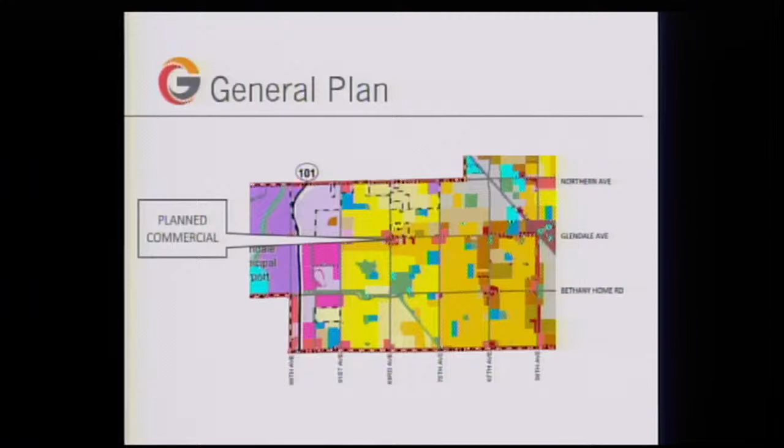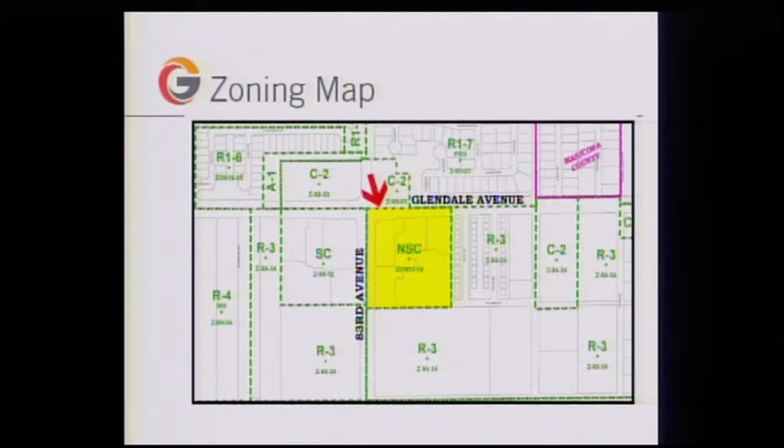A little better depiction of the site - the property is vacant at this time. You can see the development pattern and residential development that occurs north, east, and south of the site. Again, northwest and west are all commercially zoned properties.

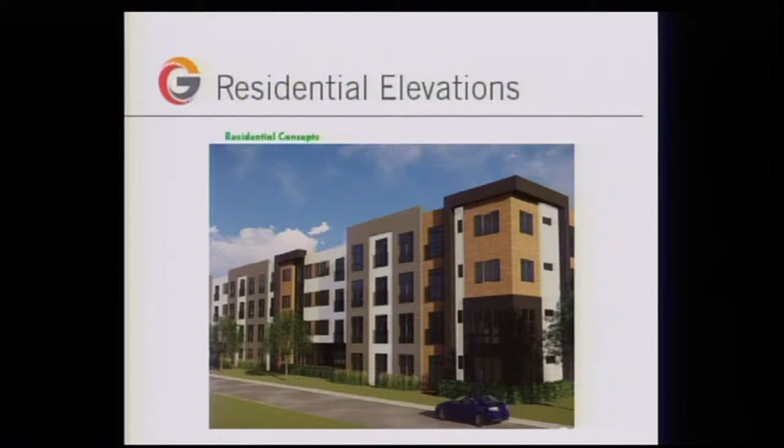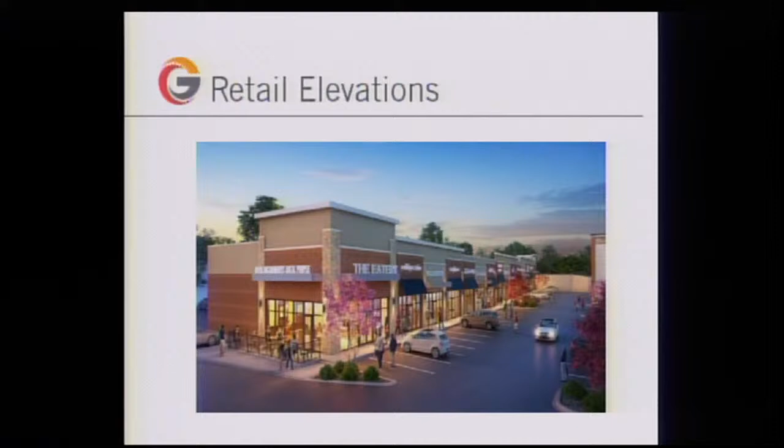These are some elevations provided in support of the request: the residential elevations, concept elevations for the possible lodging facilities and hotels, and for the retail portion of the site.

As far as public involvement with this request, there was an initial notice mailed out on May 13, 2019, last year, to property owners within 300 feet of the project boundary and other interested parties. That was followed by a neighborhood meeting at Westgate, at the Hampton Inn, I believe.

The request has since been advertised. The hearing this evening has been advertised and posted May 14th of 2020. We've also mailed hearing notices regarding the request on May 17th of 2020. We received one comment in support of the project. There should also be a citizen participation plan attached to your packet, detailing the public involvement portion.

Staff finds the request is consistent with the Glendale General Plan, that it complements adjacent development at Westgate, and encourages infill development. Staff is therefore recommending approval of GPA 1910 and ZON 1905, subject to the following conditions.

First, the site plan dated May 1st, 2020 and elevations dated May 1st, 2020 are considered conceptual and are subject to final design review approval.

Second, the applicant shall work with the city's transportation department to resolve the design, location, and number of access points to the site. The number of access points, the width of the access, and the design of the driveway shall adhere to the City of Glendale's engineering standards.

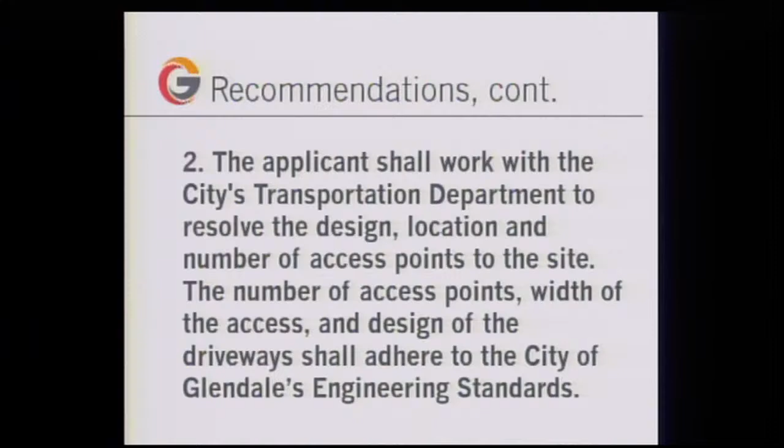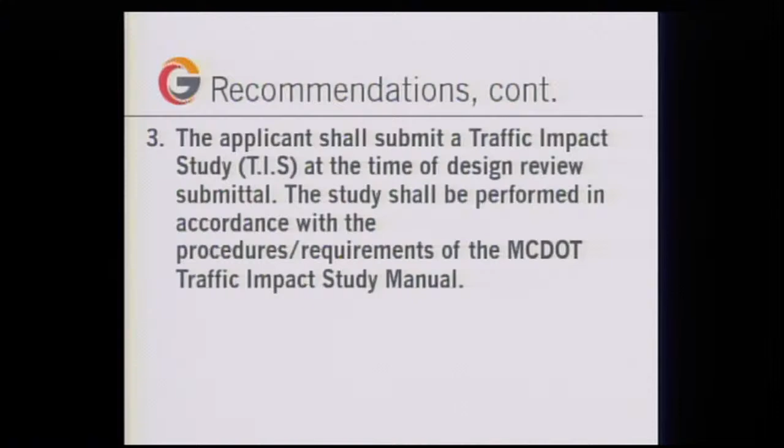Third, the applicant shall submit a traffic impact study at the time of design review submittal. The study shall be performed in accordance with the procedures and requirements of the MCDOT Traffic Impact Study Manual.

Fourth, the developer shall provide the half-street right-of-way dedication along Glendale Avenue and 83rd Avenue with all associated roadway improvements listed in the City of Glendale's engineering standards.

Fifth, the 12-kilovolt power lines along 83rd Avenue shall be placed underground. Sixth, a minor lot division shall be required if buildings are to be developed over the lot lines.

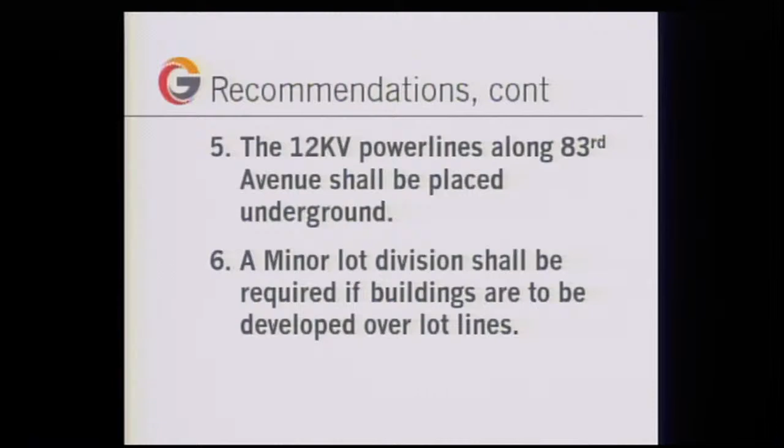Seventh, the developer shall record a notice to prospective purchasers of the proximity to Glendale Municipal Airport, in order to disclose the existence and operational characteristics of the airport to future property owners or tenants of the property. Eighth, design review will be required.

Mr. Mayor, that concludes my presentation.

All right, thank you. Questions from the council? No questions from the council.

A public hearing is required, so the public hearing is now open on item 25, Resolution R20-99, Ordinance O20-55. I have no speaker cards on this item. Anyone in the audience wishing to speak? Seeing none, the public hearing is now closed.

Do I have a motion on Resolution R 20-99 on item 25? Yes, Mayor, I will make a motion, and then I ask to make some comments regarding the project.

I move that... let me find the right place. I move we adopt resolution number 20-99. Second. Okay, I have a motion from Councilmember Clark, second from Councilmember Malnar to approve the recommended action.

Any discussion on the motion? Yes, Mayor. Councilmember Clark: At this time, I have presented all of council and senior staff with my remarks regarding this item, and I would like to read them into the record, the public record, so you will please bear with me.

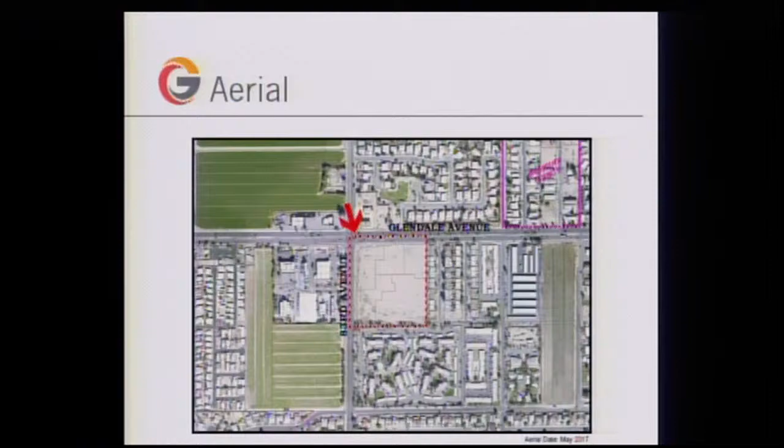One thing the Transportation Department asked early on was to abandon the Lamar Road alignment, the first major street south of Glendale Avenue. We have abandoned that, so there won't be a road back in there, which might otherwise be difficult to defend or monitor, without really knowing what people might be doing back there.

These are the duplexes I mentioned, apartments, more duplexes, self-storage, and a care facility. The nearest single-family home, Councilman Malnar, is down here on Ocotillo, about a quarter-mile south of the site. If I may, Mayor, how close are they to the duplexes? The duplexes would be here.

If the site were designed and approved with this configuration, the distance from here to the duplexes would be about 175 feet.

Additional questions, Mayor, if I may. Go ahead.

The other objection was about the gasoline station having an additional convenience store. With one already there, what would be your objection to not having that stipulation? Our preference would be to have a financial institution on the corner. That particular end user, I can't get up here in front of council and the public and say that we're going to have a financial institution on the corner.

Is that accurate? Mayor, Councilmember Malnar, the exhibit that's part of the slide and part of the packet, again, we're only looking at 88 units. It's only on 5 acres, and the 17.4 units the acre, that's been the sweet spot for Glendale in terms of multifamily, for probably 25 years.

Properties that I've noticed have gotten approved recently are a lot higher density. Do we need 4-story on the site? Probably not. We could probably live with a 3-story height limit.

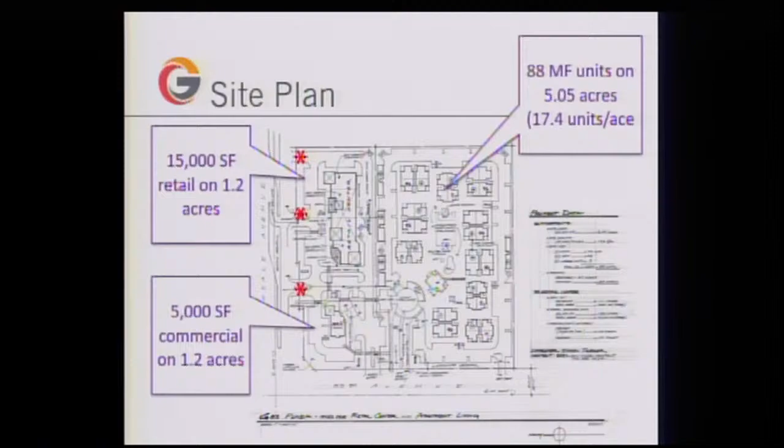The site plan or some of the renderings that were provided are illustrative in nature. The one is showing 4-story. It probably would not, because the site is so small, would probably not render 4-story apartment buildings. To directly answer your question, Councilmember Malnar,

5 acres out of an 8-acre site, I'm not the best mathematician. Probably 50% of the site is shown as multifamily. The apartment or the hotel that we're hoping to locate, should it locate on the site, would probably be here, and then the multifamily would go away.

Very good. That's all the questions I had. Mayor. Go ahead, Mr. Froak.

I'm glad you admitted you're not a good mathematician, because in your narrative, you state that 61% of the site will be consumed by this apartment complex. It's not my words, I didn't do the math on it. Y'all did. Now I hear talk like it's only 5 acres. Yeah, it's only 5 acres of an 8-acre site. So in essence, the majority of the site will be consumed by apartments.

You keep saying a couple of things that bother me. One is that, well, we don't think apartments are really going to come to this site. Well, if you don't think so, why are you fighting so hard to make sure that you do have multifamily approved on this site, number one? Number two, you say that your client has it in escrow to a developer. Well, does that developer have any end users? Are any of those actually end users multifamily? No.

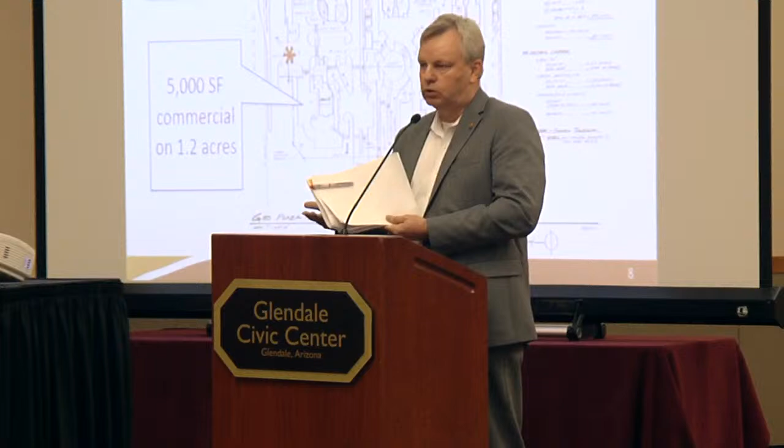So again, if I had 20 people here or 5 people that were concerned with the project, we would have worked with staff and would have tried to work this out. But I don't like to negotiate at the podium. I got your stipulations about an hour ago, and I'd rather fall back on what you suggested on the liquor license, where we go with the staff recommendation, and in this case, the Planning Commission recommendation for approval.

Mr. Mayor, may I respond? The reference to the truck stop is beneath you, John, but I'll let that one go. Secondly, I believe we met at least on one occasion, and perhaps more, on this very project. And at that time, I conveyed to you, in no uncertain terms, that I didn't believe apartments were appropriate for this site. And you represented to me at that time that that was not the plan. So I was very surprised when I finally saw this conceptual in the packet that shows a plan that includes multifamily. And that's all that I have to say. Thank you.

Any other comments? Mayor, go ahead. Thank you, Mayor. So, Mr. Folk, I guess the idea, ideally, it's going to be a hotel, and a 2-story hotel there obviously wouldn't work either, right? So the height would work for either the multifamily, which I'm guessing probably the density is needed for it to pencil out financially for the project.

Mayor, Councilmember Tolmachoff, correct. It's a free market society. That's what this state believes in. We're a private property rights state. I've got a client that sat on the property now for 17 years that can't do anything with it. I spoke to him a few hours ago. He was going to be here tonight to discuss some of the past conversations that he has had with the city, with Councilmember Clark. We agreed just to have me come down here and represent the item.

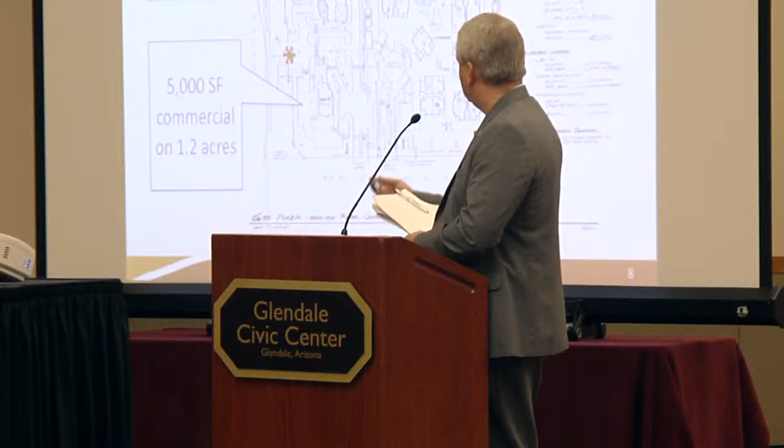When I've walked the site, I've picked up debris. It's not really doing the community much good. Like I said before, what we're going to do when the site develops, and hopefully someday it will be nice, we're going to work out all of the transportation components, access points. The median break was set up to serve the site, and so we're going to continue to work with the staff, and we will work with the neighborhood as needed once we do end up with final users.

So is this speculative zoning? Yeah, to some extent it is, but we can't live with the existing zoning. And like I said before, as part of the presentation, the site was multifamily for the entire 8 acres, and in good faith, the owner agreed to the rezoning years ago and tried to find users, and nobody was willing to develop 50% of the site in phase 1 with financing and things of that nature.

So we feel that we've worked with the neighborhood really closely, and we will continue to work with staff and with the neighborhood to try to make this a high-quality project for the city. Mayor, I don't have anything else.

If I could respond regarding Councilmember Tolmachoff - as you know, there's a 300-foot notification, which means the Walgreens, the Ella's Bar, and the owner of the vacant gas station would have been most likely the only people notified. I did not raise this as an issue with my constituency because I had relied upon representations that there was no multifamily coming, and only became aware of it when we got the packets.

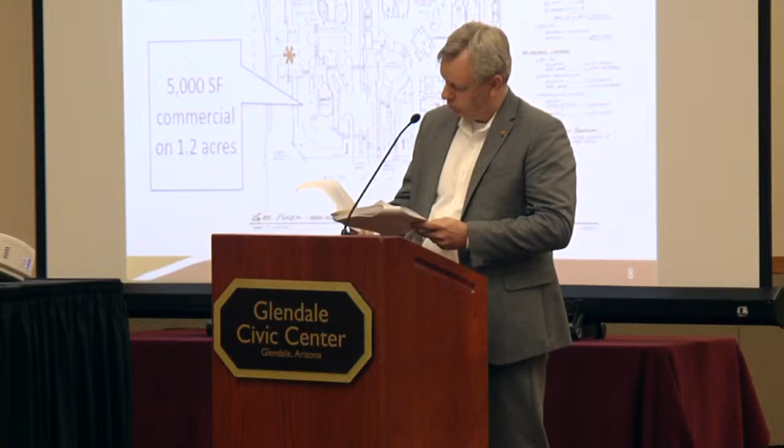We'd actually just prefer the 8 stipulations, like I said, but we could add the 2 stipulations and drop the third one regarding the CUP. As Councilmember Malnar indicated, the market's going to decide if somebody really wants to put a gas station on this corner. The site on the northeast corner with the abandoned gas station and the C-store and the billboards, they closed for whatever reason, I don't know, but it's been in that condition for a long time.

And I don't know if anybody remembers, but inside that gas station on the northeast corner there actually used to be a Taco Bell inside. A lot of people may not remember that. For whatever reason, I don't know, I think it's a great location, but it's never come back. Maybe the price is too high, I don't know.

You had a question? Thank you, Mayor. Yes, I'm not comfortable with changing the percentage. If your developer's willing to go 3 stories, they lose 25%, so they go from 88 to 66 units anyway. If they lose space, the project may not work. So I feel like a 3-story is a fair compromise anyway, and leaving it at the 5 acres I think is reasonable, because it has to make financial sense for the developer to pursue it.

But I think Mr. Froak said that 50% would be okay. Right, that was correct, that was my understanding. 50% would be 4-point-something acres? Mr. Froak indicated yeah, he could support 3 stories at 50%. That's what he said. We'd be okay with that.

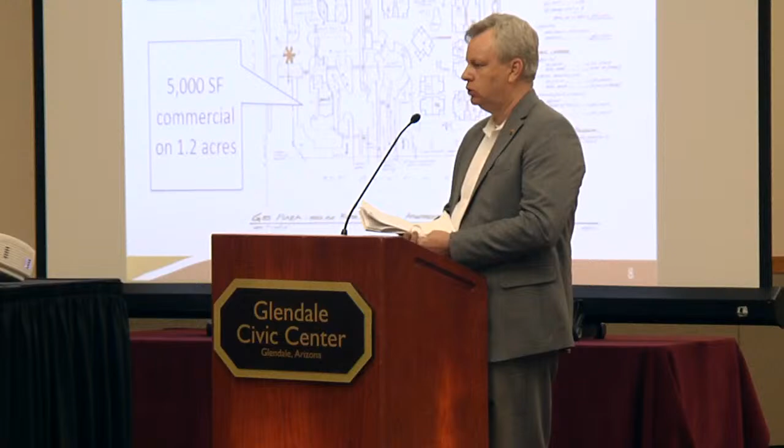Yeah, if you go to 50%, that's...

Mayor, may I state that there are certain guidelines and standards that even apartments have to comply with, requiring a certain amount of landscaping, whether it's on 4 acres, 6 acres, or 10 acres. Rather than assuming it will retain the same density, I'm assuming it will have to reduce density to accommodate the City of Glendale's guidelines and standards for development. So we're coming at this from two different angles.

Mayor, if I could, what I'm saying is the lower density may not make financial sense for the developer, and then the parcel remains vacant.

Councilmember Tolmachoff, I would just reiterate, in a conversation I had with Mr. Froak prior to this meeting, he was still representing that there probably wouldn't be apartments at this site. I don't know what's going on at this point, but I do believe that if apartments are built, this site should not be consumed predominantly by apartments. This site was always intended to provide neighborhood retail.

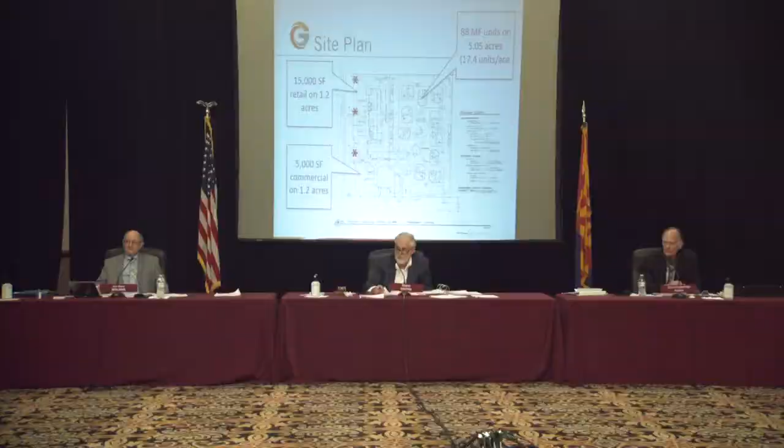Okay, any other discussion? Hearing none, roll call vote. Point of order: your stipulations aren't going to be placed in your resolution. Your stipulations will be placed in the zoning ordinance.

Sorry, okay. Then I will offer my original motion, which is the resolution only. I ask that this council approve resolution number R20-99. Okay, we have had lots of discussion.

I have a second from Mr. Malnar, and a motion from Councilmember Clark. We will do a roll call vote. Councilmember Aldama, how do you vote? Aye. Councilmember Clark? Aye. Councilmember Hugh? Aye. Councilmember Tolmachoff? Aye. Councilmember Turner? Aye. Vice Mayor? Aye. Chair votes aye.

Now moving on to ordinance 020-55 with stipulations. Yes, Mr. Malnar, go ahead and make the motion with the stipulations. I move we pass and adopt ordinance number 020-55 with the following two stipulations.

Number 1, any multifamily constructed on this site shall be no more than 3 stories in height. And stipulation number 2, multifamily can comprise no more than 50% of the developable land on this site.

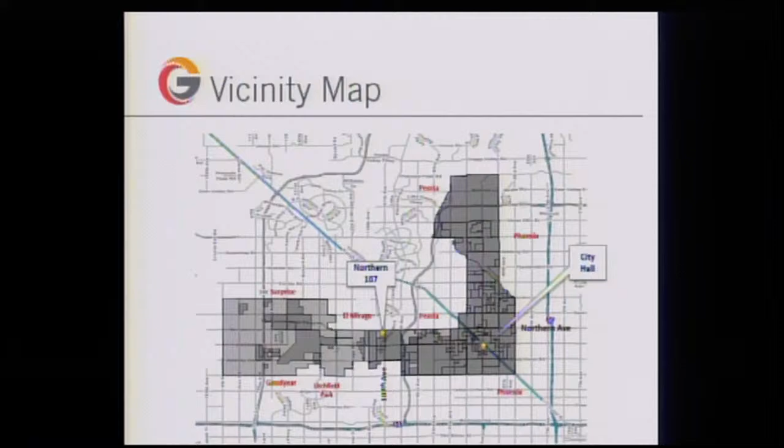The council has taken previous actions regarding this subject site having to do with annexation of the property. It was part of a council work session on February 25th, where we introduced the annexation proposal along with the proposed retail and multifamily residential project. Council consensus at that time was to move forward with the annexation process. There was a public hearing on the annexation proposal on April 14th, which was the public review following the filing of the blank petition that initiates the process. At the City Council meeting on June 9th, the annexation was approved and is now in full force and effect. It is now part of the City of Glendale.

Purpose for the hearing this evening is to consider GPA19-08, an amendment to the city's general plan from medium-density residential, 3.5 to 5 units per acre, to high-density residential 20 - that is 12 to 20 units per acre - and general commercial. The second request is a zone change from general commercial C2 to planned area development, to include commercial uses and a multifamily residential component.

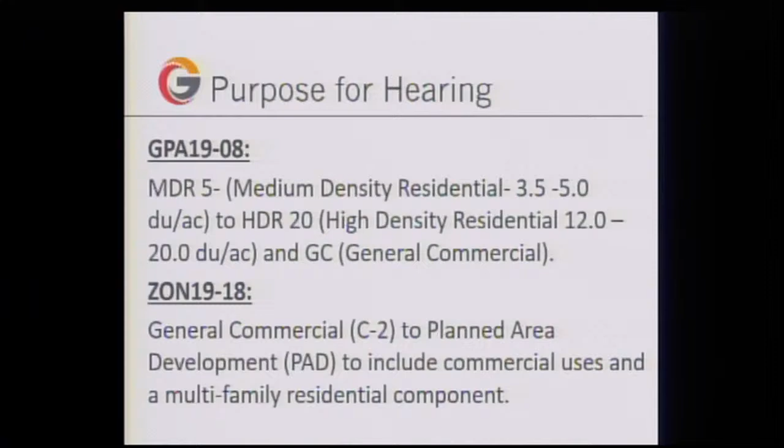The request involves a 10-acre parcel located at 107th Avenue and Northern. The proposal is multifamily, residential, and commercial uses, depicted on the screen inside the yellow dots. This is the southwest corner of Northern and 107th. To the north is the city of Peoria. To the west and south are residential areas within Maricopa County. To the east of the site is the city of Glendale.

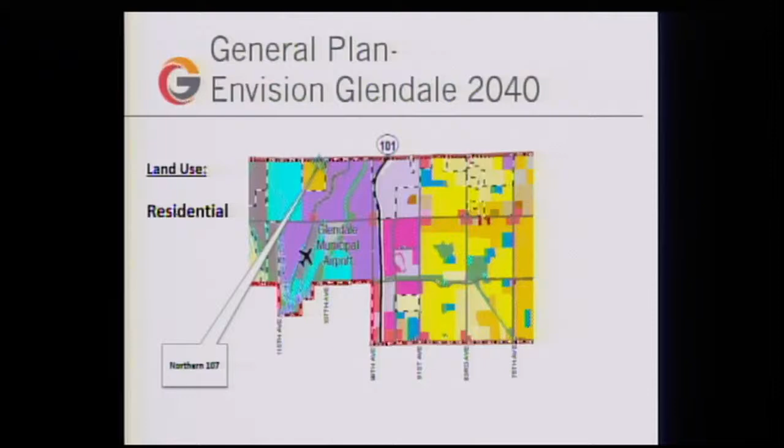This is part of an area previously outside the city, recently annexed, designated by the general plan as medium density residential, 5 units to the acre. Land use assumptions with regard to the planned area development involve either a commercial and residential combination or a commercial-only facility. The Northern and 107 planned area development, PAD zoning, was recommended for approval by the Planning Commission on May 7th, 2020.

With regard to fiscal impacts and assumptions regarding development of the facility, there are two options. One would be a combination commercial and residential facility, which would be the lowest range revenue scenario. The commercial-only option would be the highest range. As discussed as part of the annexation proceedings, the different possibilities are mapped out here, showing the revenue stream from the combination of uses versus commercial only. Annual net benefit range would fall between $120,425 and $292,658. One-time revenues for the residential-commercial combo would be $433,000 in construction sales tax versus $235,000 for the commercial-only component. Again, this is something the City Council considered as part of the annexation process.

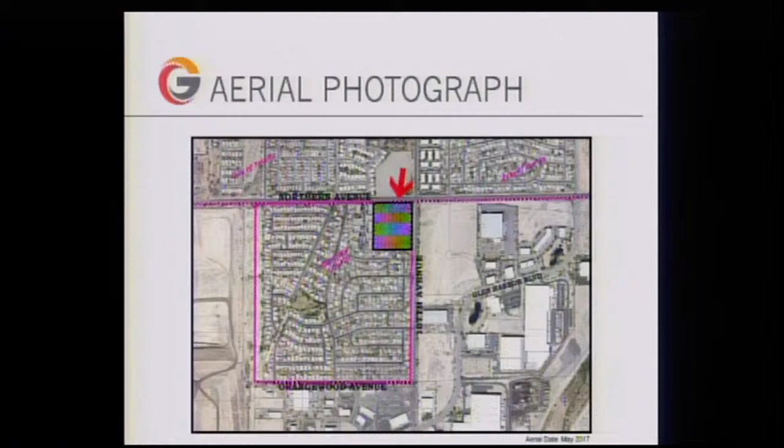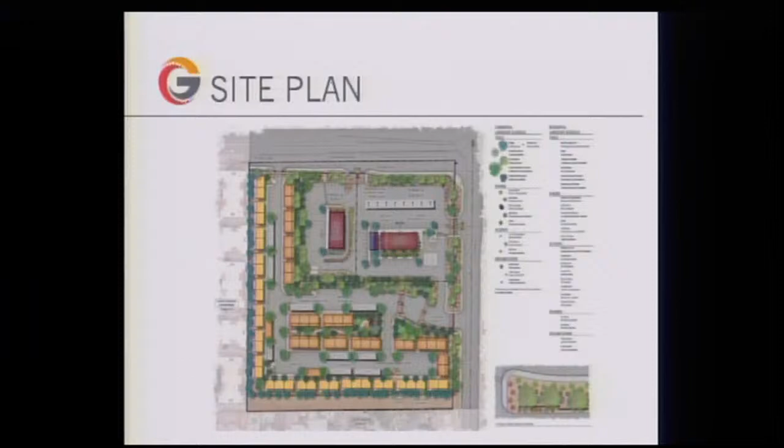A little better look at the property, the landscaping, and the layout setbacks. I wanted to point out this is a 15-foot setback along the west boundary, as well as a 48-foot setback along the southern boundary that includes an easement in that location.

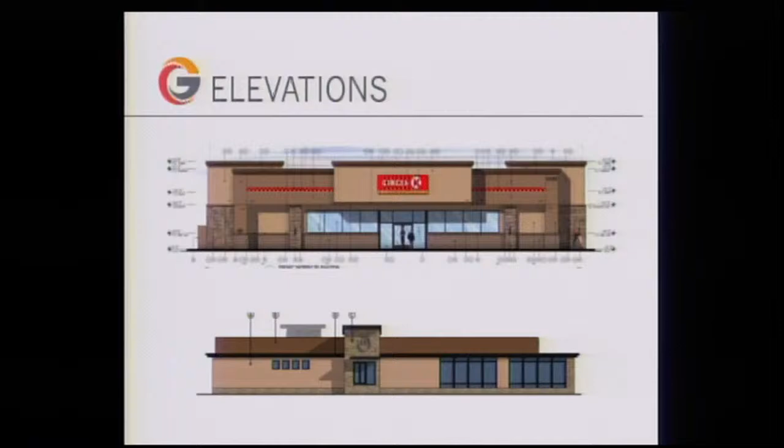Just quickly, some elevations that have been forwarded as part of the anticipated submittal on the Circle K at the hard corner, as well as the residential development interior to the community. The single families are at the top of the screen, single story at the top, and the 2 stories at the bottom of the screen.

With regard to public involvement, the initial notice regarding this proposal was mailed out on March 26th, 2020 to property owners within 300 feet and other interested parties. There were a total of 32 mailings within 300 feet. The request was advertised and the site was posted April 16th of this year. Hearing notices were mailed April 17th, 2020. There was a neighborhood meeting on March 11th.

We have received written commentary from a representative of the property owners to the west, highlighting some of the issues regarding traffic, privacy, and noise. They've also talked at some length about the possibility that 2-story buildings could be placed next to the perimeter of the property. This is a 1-story residential development next door.

The developer, working with the owners next door, has decided to go with single-story structures along the perimeter, and the 2 stories would be limited to the interior of the project site. Through the review by the Planning and Zoning Commission, the total number of units was also reduced from 91 to, I think, 74. We've got that in the stipulations. I'll come back to that.

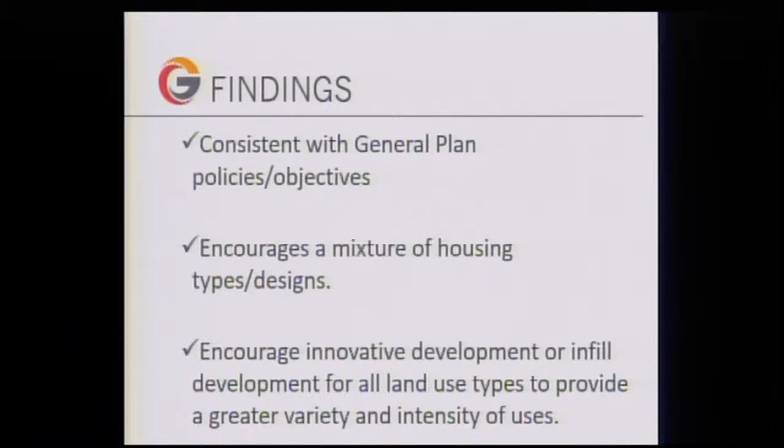Staff is therefore recommending approval of GPA 1908 and ZON 1918, subject to the following. Number 1, development in substantial conformance with the development plan dated April 9th of 2020. Number 2, the developer owner of the shopping plaza shall be responsible for providing and constructing a CMU wall with a minimum of 8 feet in height along the property lines that abut residential zoning districts. Excuse me, 8 feet or 6 feet? It says 6 feet here. Okay, I think you said 8 feet. Did I say 8? I'm sorry, 6 feet.

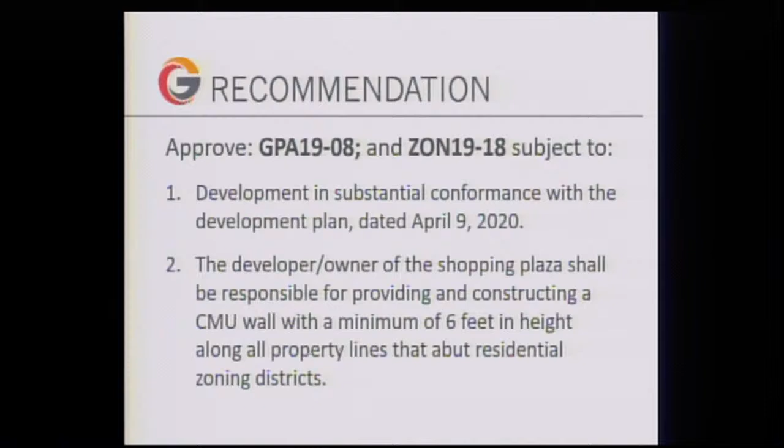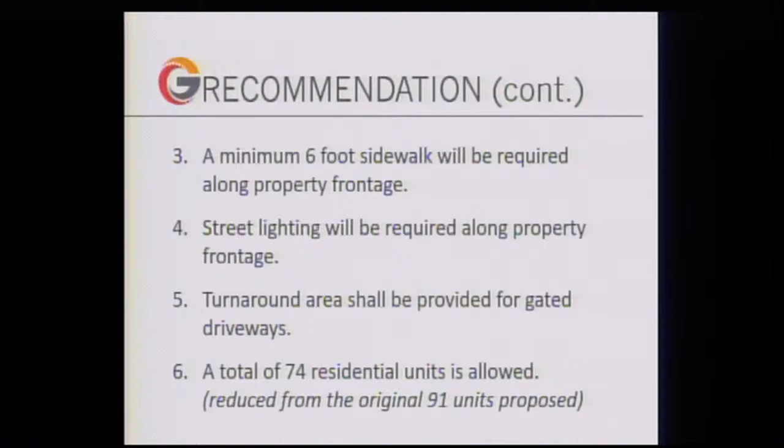Number 3, a minimum 6-foot sidewalk will be required along property frontage. Number 4, street lighting will be required along property frontage. Number 5, turnaround areas should be provided for gated driveways. Number 6, a total of 74 residential units are allowed, as opposed to 91. Mr. Mayor, that concludes my presentation. I'll respond to any questions.

Okay, and I'm trying to, Mayor, figure out why my paperwork's showing different numbers than yours.

Mayor, I want further clarification because it's my understanding, Mr. Gerhart, that the applicant did agree to an 8-foot perimeter wall, despite what your narrative shows tonight. I also want to clarify for the public that lives in that area that I have received assurances the applicant will be building 1 story to the west and to the south, abutting the existing residential units already there. So, Mr. Gerhart, can you clarify whether it's an 8-foot wall or a 6-foot wall? You know, I was just looking at this in the code book for someone else recently. I believe the code standard is 8 feet between commercial and residential. I believe the applicant agreed to the 8-foot. Yeah, I think you're correct. So I think that needs to be corrected within the narrative.

Yeah, if I could, my confusion here is my paperwork showing resolution 020-100 and ordinance 020-56, but the chart up there says GPA 1908 and ZON 1918. So I'm either reading this wrong or it's wrong on the board. I just need to make sure we do it correctly so the public's not confused either. Correct, I think it's GPA 1908. I'll have to check that.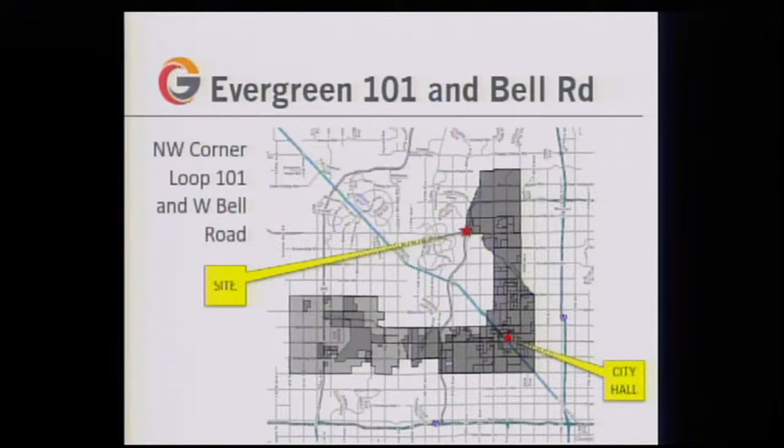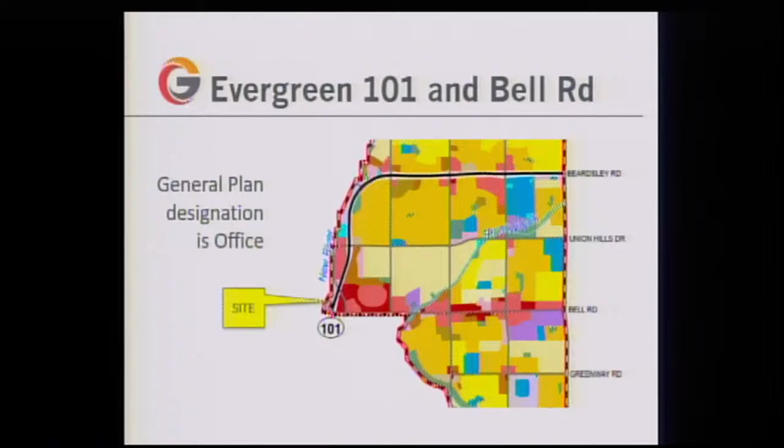Depicted here in the slide, the current general plan designation is for offices. The site is exactly west of the 101, right at the edge of the city boundary. This is the zoning map depiction, with the subject property shown in yellow. It was previously approved as a planned area development some years ago. That's the Loop 101 right-of-way just east of the site, and 83rd Avenue wraps around the property and crosses Loop 101 to the south. Somewhat east of here, you can see the detail of the Arrowhead Mall, just for reference.

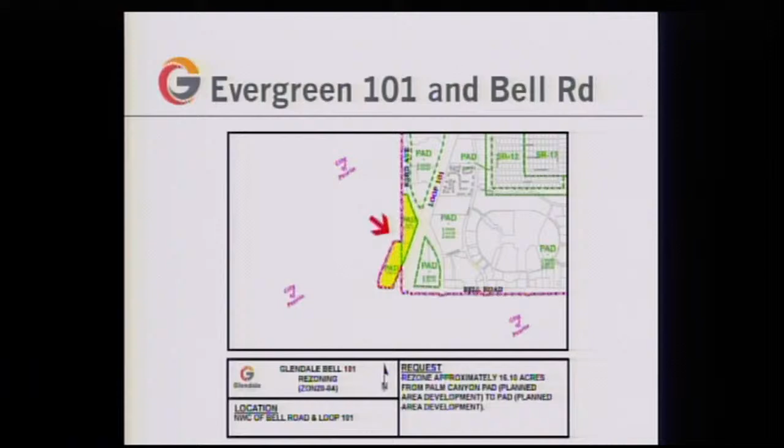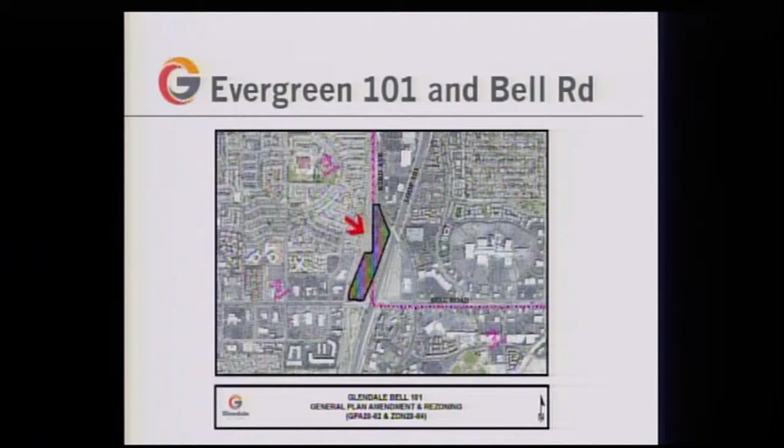Once again, the property location: a portion of the site is encumbered by the FEMA flood channel for the New River corridor. Again, you're looking at Bell Road and the Loop 101 and the intersection of 83rd Avenue. Areas to the northwest are largely residential; the rest of the adjacent properties are pretty much commercial.

This is the subject property, tipped counterclockwise with north to the left of the screen. That's 83rd Avenue at the property frontage, which would be the site of the primary access. At the opposite end, there would be an emergency-only access at Bell Road. In between is a linear parcel, about a quarter mile long and maybe 300 feet wide, with the 101 on one side and the flood channel on the other. The plan includes 4 L-shaped buildings, 4-story structures, 60 feet tall, 26 units to the acre, totaling 418 multifamily units as part of this project.

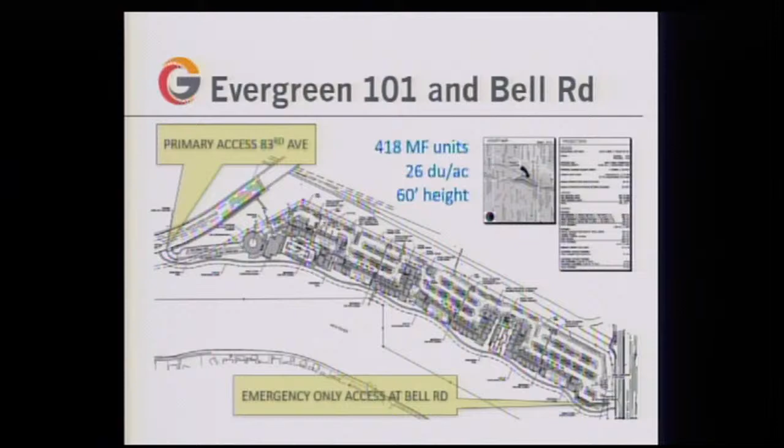With regard to the history of the site, it's currently vacant. It was approved as part of a prior planned area development known as Palm Canyon by the City Council in 2006, but that was never developed.

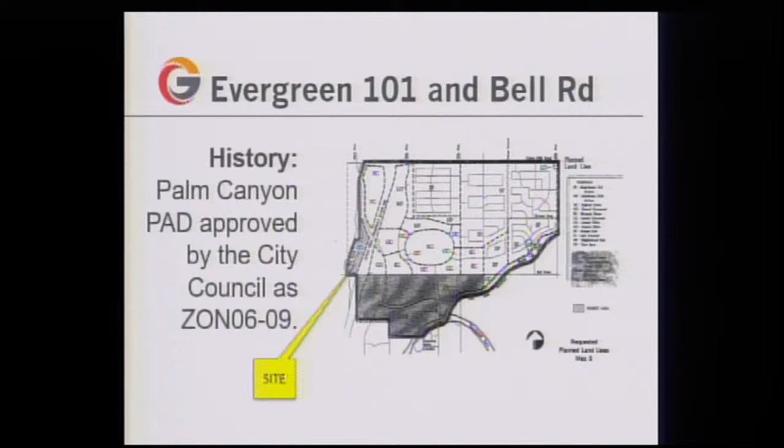The applicant is arguing that this is not a good site for commercial development, due to the size and shape of the project and its proximity to the Wash Channel. It's difficult to develop in a commercial format.

This is a better look at the site. You can see the Arrowhead Mall to the east, along with access roadways also to the east, 83rd Avenue and 101, and to the south you can see Bell. There's a high-density residential development site to the northwest, and the rest is commercial.

Initial notice regarding this project was mailed out on April 24th to property owners within 300 feet of the property. There was a neighborhood meeting on May 11th. The proposal site was posted on June 23rd. The hearing request was advertised June 25th in the Glendale Star, and hearing notices were also mailed out on June 26th.

There were some comments received. They're part of the citizen participation final report that are included in your packet.

As far as findings, staff feels the PAD proposal would result in a quality development product which is consistent with the goals and objectives of the general plan by offering a variety of housing types, promoting some additional housing variety, and developing a difficult infill site.

Staff is recommending approval subject to the following stipulations. Number 1, the development of the site be in substantial conformance to the Evergreen Loop 101 and Bell Road PAD submittal dated June of 2020.

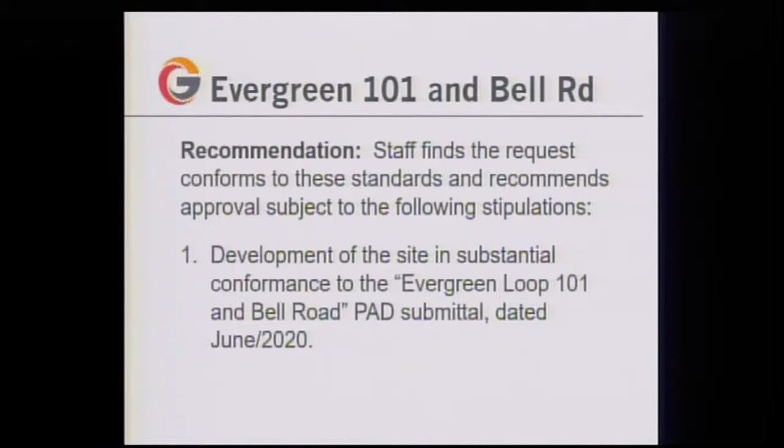Number 2, modifications to the river need preliminary and final approval from FEMA. There is a conditional letter of map revision, CLOMR, required by FEMA prior to development, as well as their letter of map revision, where they update the FEMA flood maps as a follow-up. No building certificates of occupancy would be obtained until the LOMR is received from FEMA.

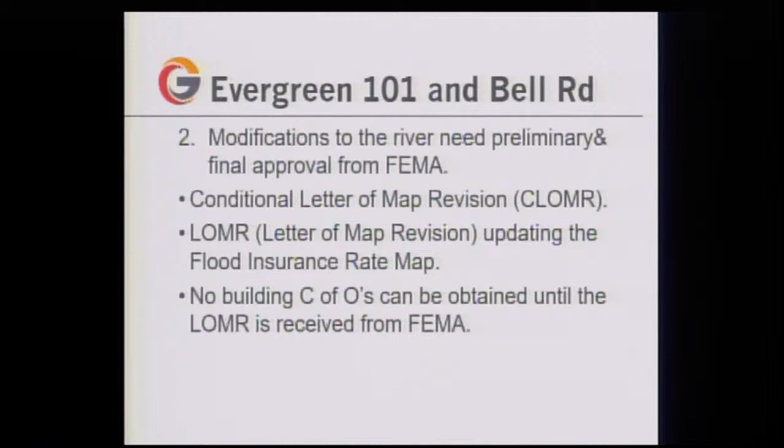Number 3, implementation of the traffic study. There are site improvements required at the access point from the development onto the 83rd Avenue intersection, including a southbound 83rd Avenue right turn deceleration lane and a northbound 83rd Avenue left turn lane. A left turn out of the site will need to be constructed by the developer, requiring modifications to the existing raised median at the north of the site. The developer will be responsible for the cost of all required off-site traffic improvements.

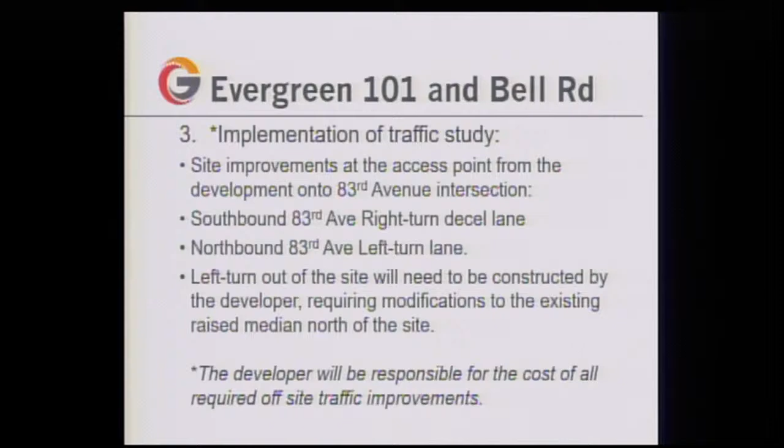Number 4, all half-street improvements on 83rd Avenue adjacent to the site would be completed with development of the property. Number 5, right-of-way improvements include streetlights at the property frontage, 6-foot wide sidewalks on arterials, and an ADA accessible route connecting the site to the 83rd Avenue right-of-way.

Number 6, approval of a minor land division application lot tie to combine all the parcels. There are about 7 separate parcels that the site plan overlaps currently, and they would have to be combined. Number 7, submittal of a signed Proposition 207 waiver.

Number 8, design review for all physical development associated with the proposal, together with a sound attenuation plan as required by Section 7.705 of the City Municipal Code. Mr. Mayor, that concludes my presentation. If you have any questions, I'd be happy to respond.

Questions from the council? No one? Okay, we do have one person that wants to speak. Ken Watt, if you're next door, if you'll come over here, please.

While he's doing that, we do have a public hearing. I'm going to go ahead and open that up, waiting for him. Public hearing is now open on item 27, Resolution 020101 and Ordinance 020-57.

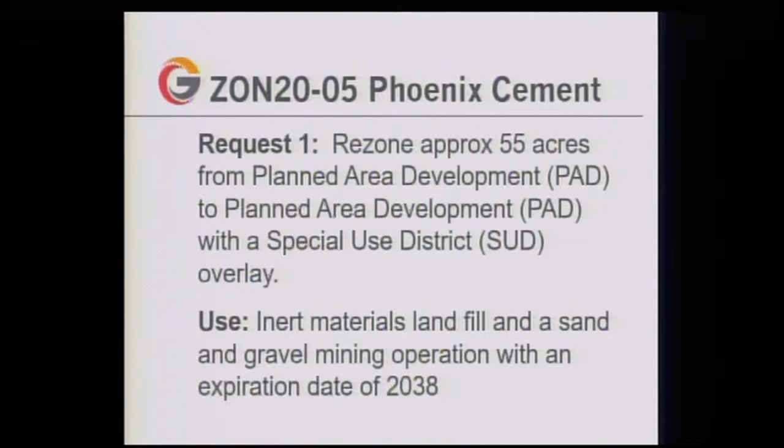Thank you, Mayor and Council. Once again, this is a request for a zoning change, specifically ZON 20-05 by Phoenix Cement. It's a two-part request. The first part has to do with rezoning 55 acres from Planned Area Development to Planned Area Development with a Special Use District Overlay. The current use is for an inert materials landfill and a sand and gravel mining operation, with an expiration date of 2038. The second part amends an existing Special Use District overlay in the PAD and light industrial M1 zoning districts to extend the time limit for mining operations an additional 5 years to the year 2038. The applicant is Gammage and Burnham for Phoenix Cement. This is the subject property, located along the east side of 115th Avenue, just south of Glendale Avenue.

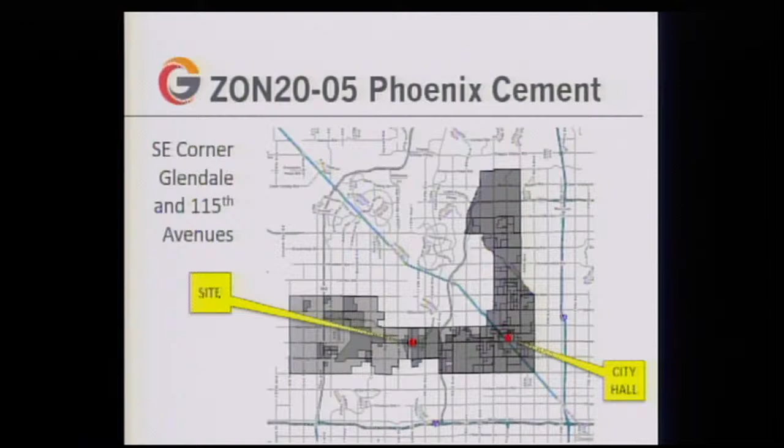It's located within an area designated by the city's general plan as appropriate for business park uses. Again, this is just alongside of the Glendale Municipal Airport.

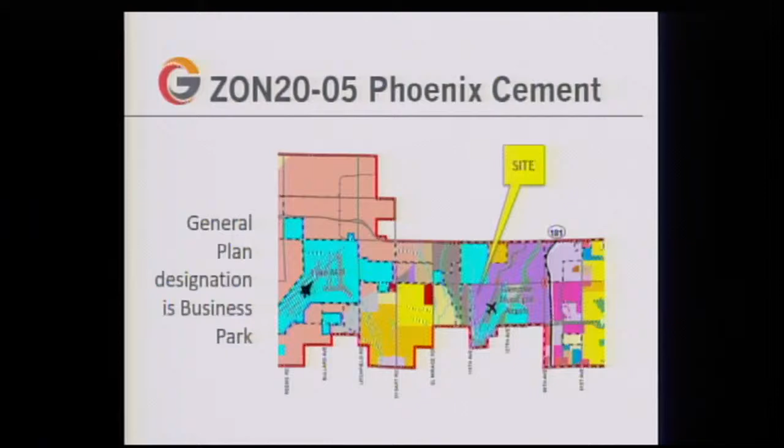This is the zoning map depicting the subject property in yellow. It overlaps two different PAD districts as well as the existing SUD district, and includes the M1 zoned property to the south where the existing operation currently commences. It's located alongside of M1 district as well as other PAD districts.

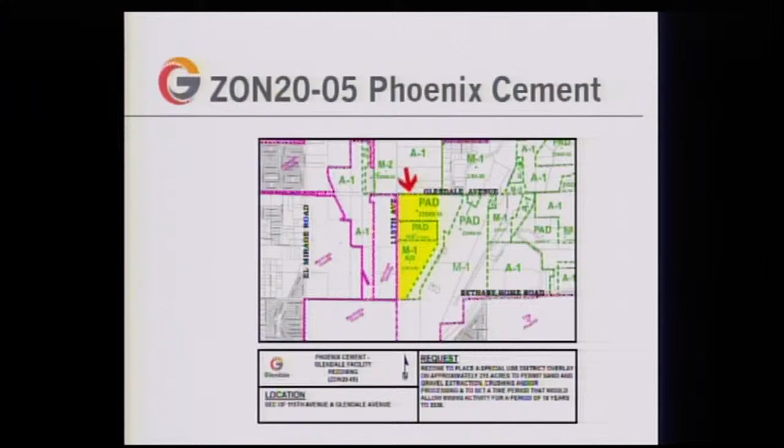Maricopa County is located to the west of the site. A1 property is located to the north. Again, the subject property is depicted with cross hatching at the southeast corner of Glendale Avenue and 115th Avenue.

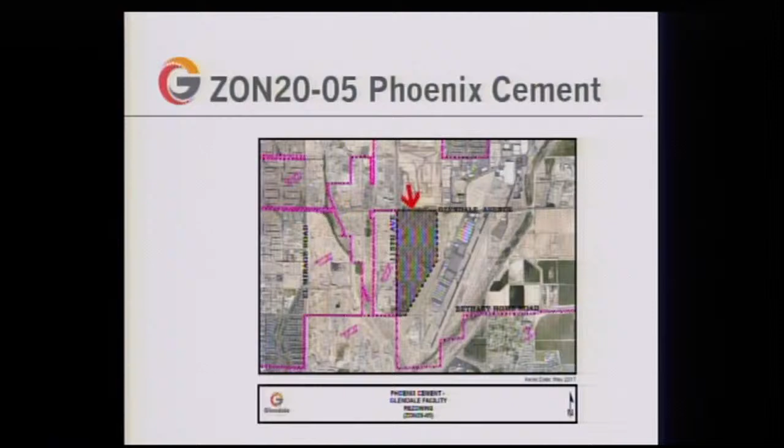If the photo was a little bit bigger, you could see the excavation occurring on the southern portion of the site as part of the existing operation. The current zoning request also includes the northern portion of the site alongside of Glendale Avenue.

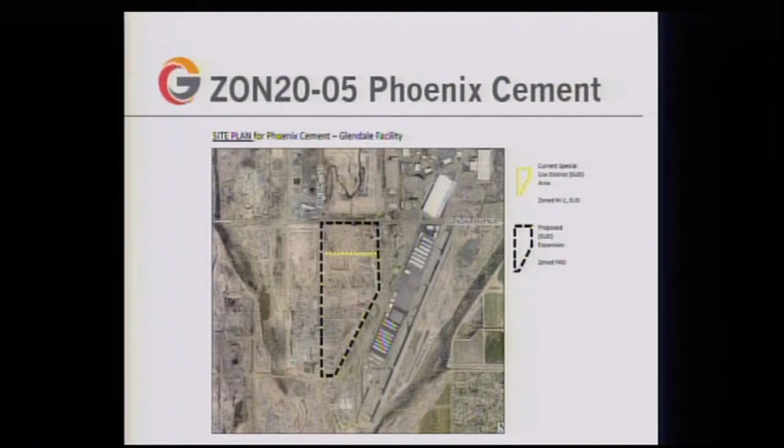Going back briefly regarding the background of the site: on August 25th, 2009, the City Council began with the rezoning of the property. They rezoned the northern 61 acres to planned area development, which permits it to be used for a business park, which has not yet been developed, and light industrial uses as part of a 217-acre master plan development.

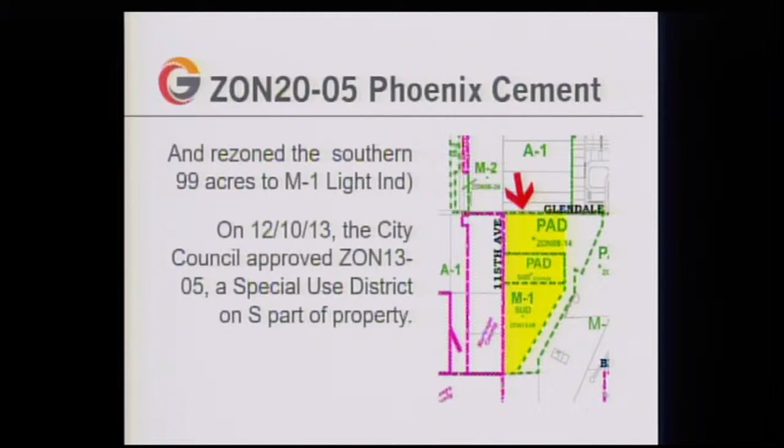They also rezoned the southern portion of the property, 99 acres, to M1, light industrial. On December 10th, 2013, the City Council approved ZON13-05, a special use district overlay on the south part of the property, basically to accommodate the sand and gravel operation.

On November 22nd, 2016, the City Council approved ZON16-05, a special use district on the middle portion of the property. The special use district permits the mining and extraction of sand and gravel until 2033.

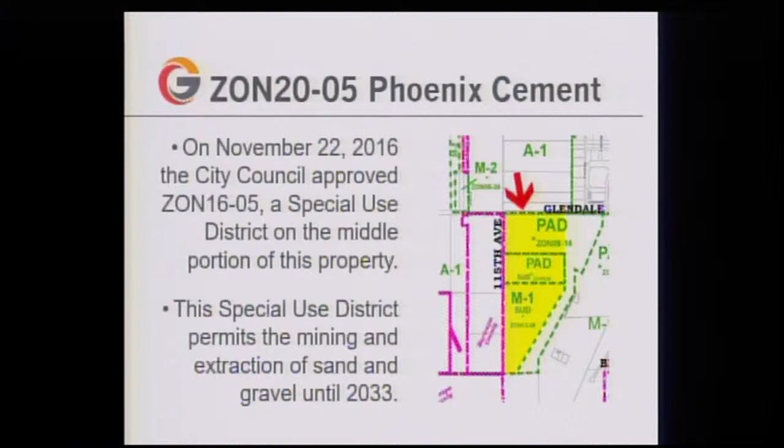So, with regard to the request at hand, what we're doing this evening is requesting that we add an SUD to the 55 acres to the north in yellow with an expiration of 2038, as well as extending the existing SUD for the area to the south from 2033 to 2038. So the site would host a sand and gravel operation from the north to the south, and the expiration would be 2038.

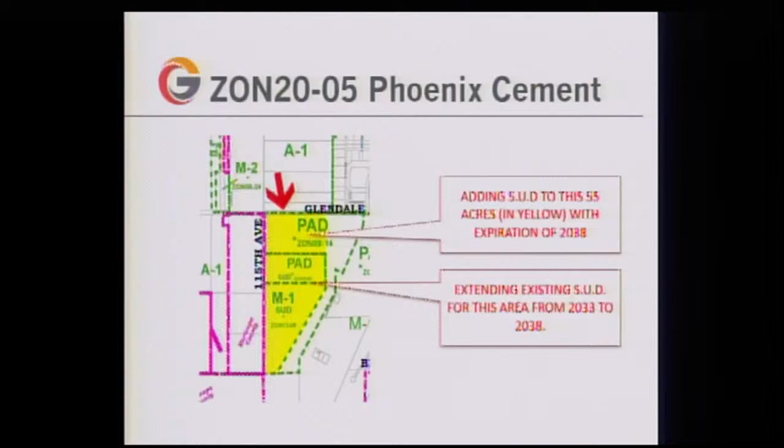With regard to the notification and involvement process behind the request, notice was mailed to adjacent property owners within 1,000 feet on February 18th. The site has been posted since January 23rd. The request was also advertised June 25th in the Glendale Star, and hearing notices were mailed June 26th. We have not received any comments that I'm aware of regarding this request.

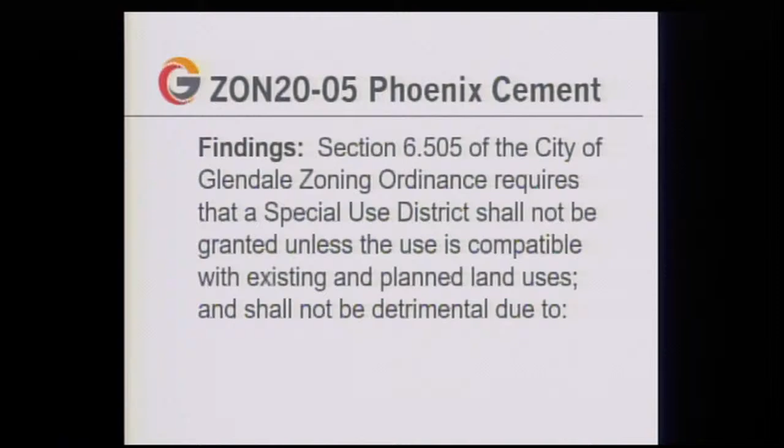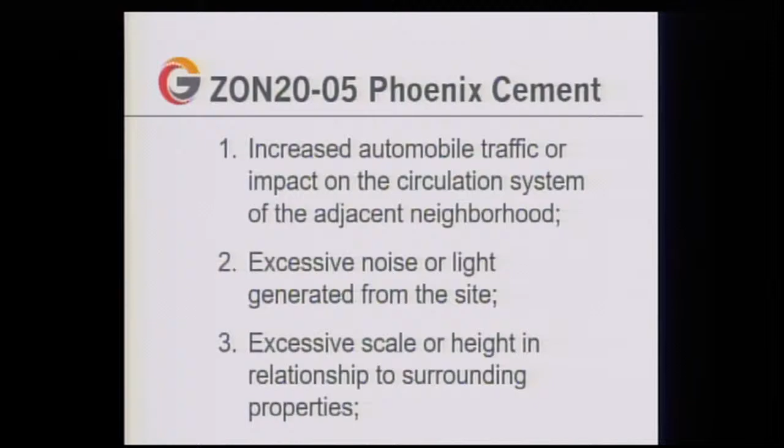Section 6.505 of the City of Glendale zoning ordinance requires that a special use district shall not be granted unless the use is compatible with existing and planned land uses and shall not be detrimental due to: 1, increased automobile traffic or impact on the circulation system of the adjacent neighborhoods; that there not be excessive noise or light generated from the site; excessive scale or height in relation to surrounding properties; hours of operation; inadequate parcel size to provide appropriate buffers or mitigation measures to surrounding properties; or 6, disruption of the development character of the adjacent properties.

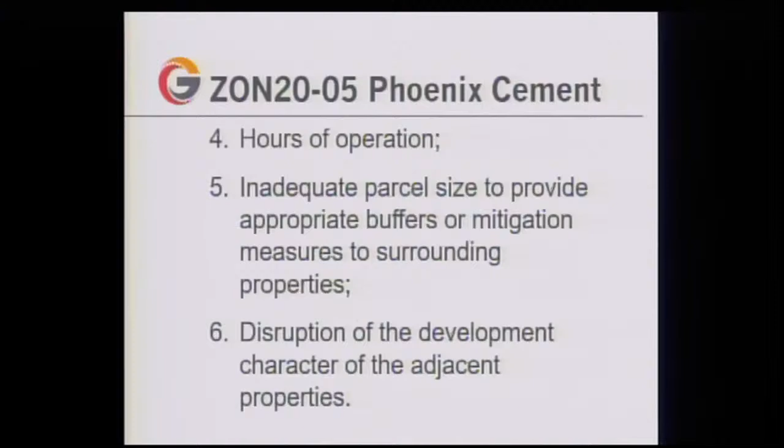Staff finds the request conforms to these standards and recommends approval, subject to the following stipulations. I believe there are 13 of them.

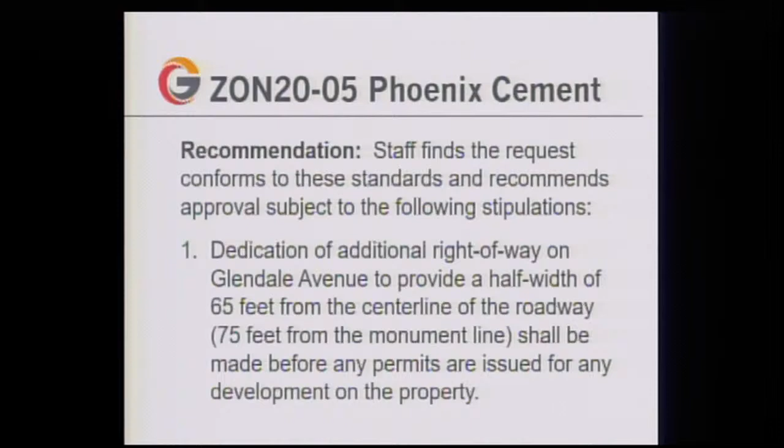Bear with me. Item number 1: dedication of additional right-of-way on Glendale Avenue to provide a half width of 65 feet from the center line of the roadway, also 75 feet from the monument line, shall be made before any permits are issued for any development on the property. 2: all half-street improvements on Glendale Avenue adjacent to the site shall be completed prior to issuing any building permits for development on the property. Required improvement standards are determined by the current version of the City of Glendale Engineering Design Standards.

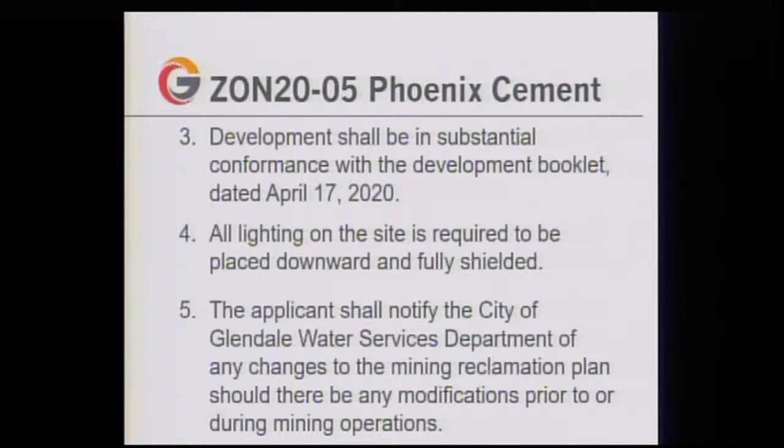3: development shall be in substantial conformance with the development booklet dated April 17th, 2020. 4: all lighting on the site is required to be placed downward and fully shielded. 5: the applicant shall notify the City of Glendale Water Services Department of any changes to the mining reclamation plan, should there be any modifications, prior to or during mining operations. 6: applicant is responsible for complying with all requirements of Glendale City Code, Chapter 18, Section 12, landfills, prior to beginning operation of the inert landfill.

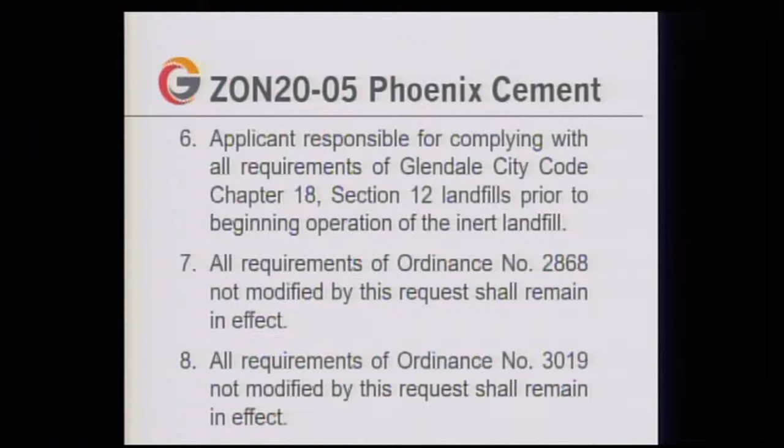7: all requirements of ordinance number 2868 not modified by this request shall remain in effect. 8: all requirements of ordinance number 3019 not modified by this request shall remain in effect. 9: developer shall provide documentation to the city prior to final approval of construction documents and/or issuance of permits that Form 7460-1 be filed for the development and that the development receive a no hazard determination from the FAA. 10: letters of determination issued November 27, 2019, aeronautical study numbers 2019-AWP-13499 through 13505.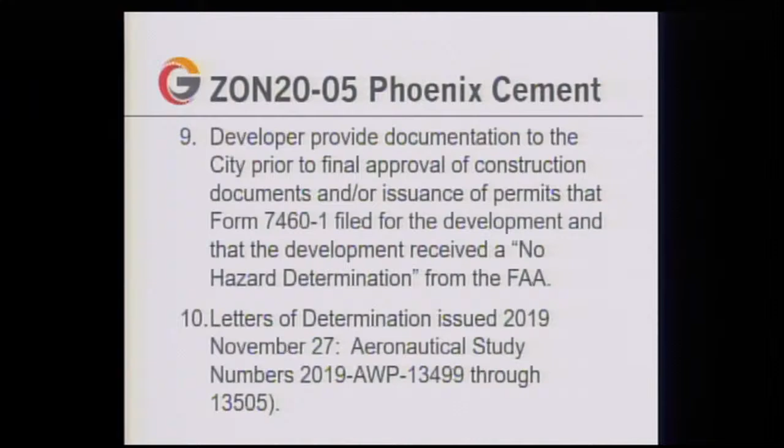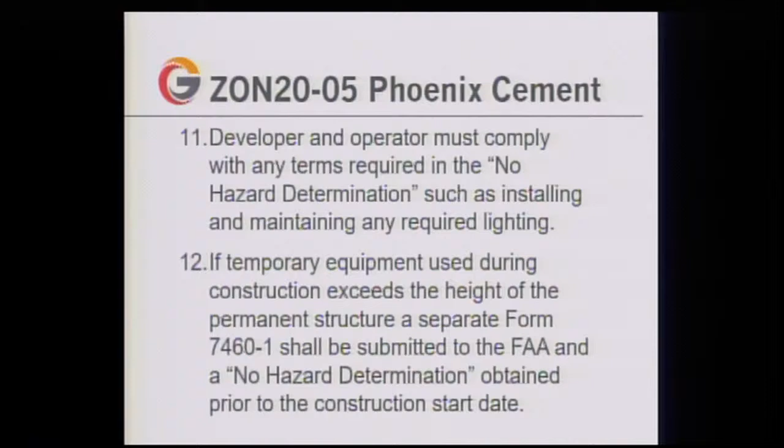The developer and operator must comply with any terms required in the no hazard determination, such as installing and maintaining any required lighting. If temporary equipment used during construction exceeds the height of the permanent structure, a separate Form 7460-1 shall be submitted to the FAA and a no hazard determination obtained prior to the construction start date. The builder or its contractors must contact the airport prior to construction if they are using cranes, so that we may issue a notice to pilots, prior to when cranes will be on site.

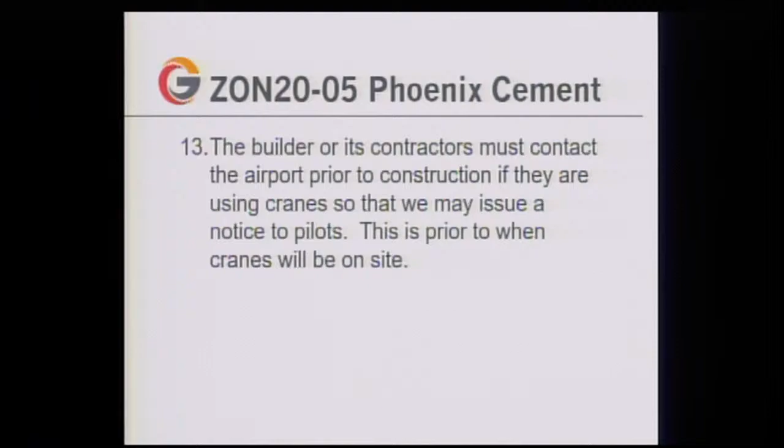Mr. Mayor, that concludes my presentation, and I'll be happy to respond to your questions. Thank you. Questions from the council?

Yes, I have two, Mayor. For clarification, Mr. Gerhart, the dedication of the right-of-way and improvements to Glendale Avenue, if I understood what you said, would not occur until the site was developed commercially or industrially? Prior to development of the site as a business park. Okay, so that would be well after '38, correct? Most likely, by the sound of it, 2038. Okay, that's one question.

Second question is, what is an inert landfill? What can you put in an inert landfill? These are non-hazardous, non-toxic substances. Well, I know, but biodegradable substances - could you put in an old car or a sink? I mean, is it material that is compactable to make the site developable, or is it just stuff? That could be anything. Good question, and I honestly don't know the answer. Thank you.

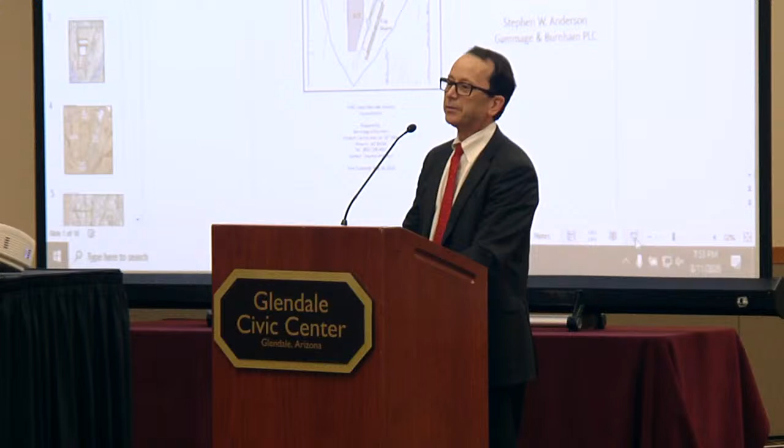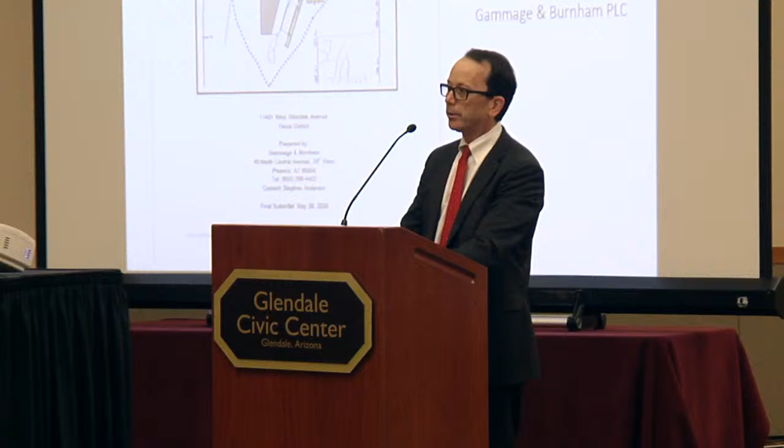Mayor, while the PowerPoint's being loaded, the executive summary of the case before you this evening is pretty straightforward and can be summarized by four factors. Number one, there are no citizen comments on this proposal whatsoever. Number two, staff is recommending approval with stipulations that have been agreed to by the applicant, thirteen of them. Number three, you have a unanimous recommendation from the Planning Commission for approval. And number four, you actually get your needed right-of-way for the Glendale expansion project, as well as a much-needed off-site retention basin for the city landfill. That's part of the discussions we've had with the city.

With regard to the proposal, it seeks to expand an existing 160-acre sand and gravel business by 55 acres, to 215 total acres, on a parcel located across from the city landfill. I'll talk about that in greater detail in a moment. The existing business has been operating on the site for several years now without incident and without complaint from any of our neighbors, most of whom are you. The proposed expansion doesn't change the nature of current operations, only the size, and we're here seeking your recommendation for approval. Phoenix Cement operates on this site with a special use district, the SUD.

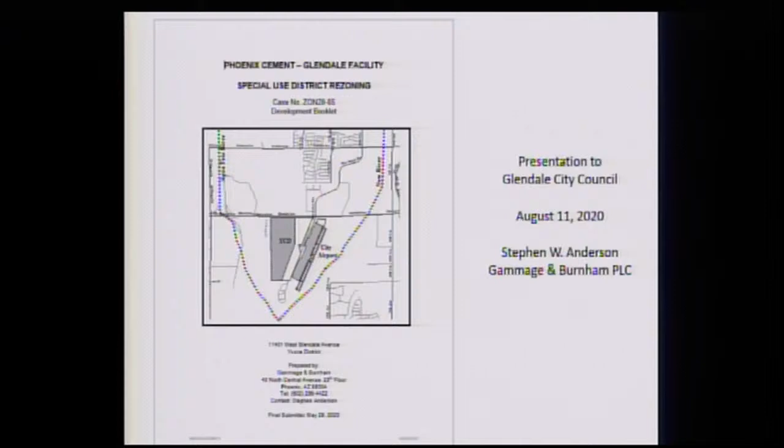Staff went through this a little bit during their presentation. The city approved the original SUD for 100 acres of property in December of 2013, and Phoenix Cement started operation the following month. So we've been operating on the site now for more than six years.

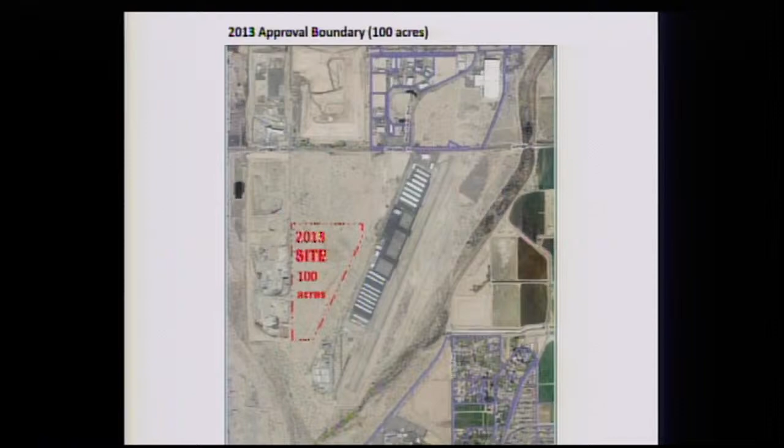In late 2016, about three years after we started operations and the original council approval, the city approved a northward expansion from 100 acres to 160 acres. This is the second expansion we're seeking. At the time, in 2016, the city confirmed that Phoenix Cement had been operating the site responsibly and in a manner consistent with its unique promises, and that there was no record of public issues with the business from any of our neighbors. No citizens whatsoever expressed comments or concerns during that hearing process.

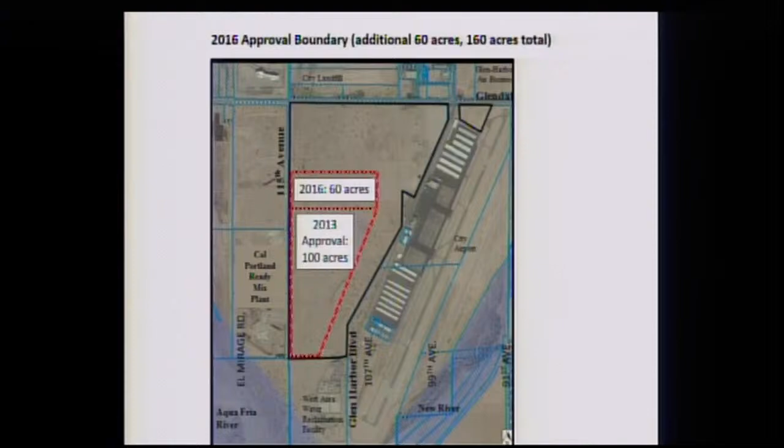What are those unique promises that Phoenix Cement made for this site? First, we promised to put all of our processing at the bottom of our excavation, 50 feet below grade, where it is invisible from the public. Second, we promised to erect a 10-foot earthen berm around the perimeter of our active operation, which means we're actually 60 feet below the line of sight. Third, we promised to maintain all of our FAA approvals for our operation in proximity to our neighbor to the east, the Glendale Airport.

We've already updated those approvals for part of this expansion. Fourth, we promised to comply with Maricopa County dust control regulations, which we obviously have to do, but such that our dust would not impact airport operations, a promise we have kept. Fifth, we promised to operate with a single point of access. We're right next to Glen Harbor Boulevard, we have proximity to it, but we do not use it. We use only the intersection on 115th Avenue in Glendale, which we share with the city landfill, so the heavy truck traffic has a signalized intersection we can share safely.

Finally, we promised to reclaim the areas on the site, as we talked about a moment ago, as soon as we finish mining a particular area. In fact, we've done so in conformance with our reclamation plan, and we're just about done with our first reclamation area on the site. So those are the promises that we made and we kept.

So, who are our neighbors? Well, our main neighbor is, as I indicated before, you — the landfill to the north. If you're standing on our property, it's the thing you're going to see. It's 390 acres in size, has a permitted height of 130 feet, and a setback of 150 feet from Glendale Avenue to its vertical face. Inside that 150-foot setback, you do activities — you actually use that frontage along Glendale Avenue for truck traffic and things like that, and you've got some equipment out there as well.

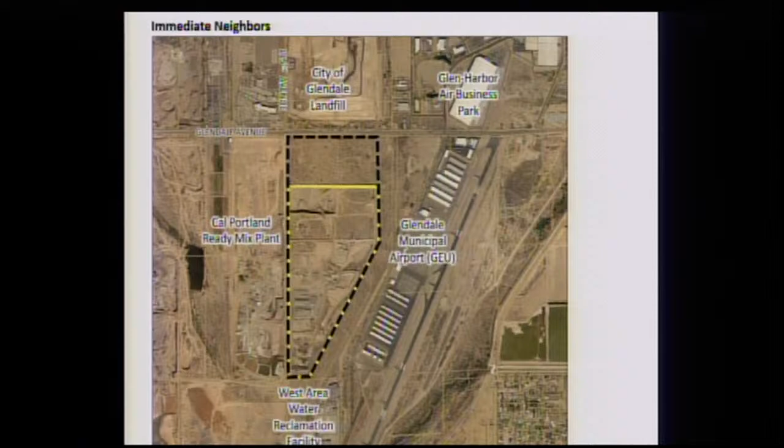Can I have the next slide, please? We have no residential neighbors. That's why I think nobody is here tonight. The closest residences are all at least a half a mile away, separated from us by distance, by riverbeds, and other industrial operations, such as your landfill.

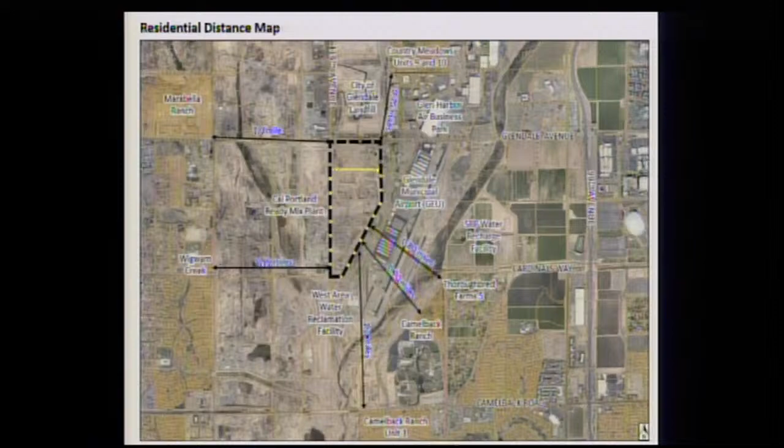So, next slide please. This is the current proposal. Four years since we were last before you, we're seeking a second expansion by 55 acres out to Glendale Avenue. In making this request, I want to confirm that we've kept all of the promises, and those promises will remain in place. We're proposing no changes in those operational conditions. To an outside observer, there should be no change to what's going on this property, except that that 10-foot berm will move closer to Glendale Avenue.

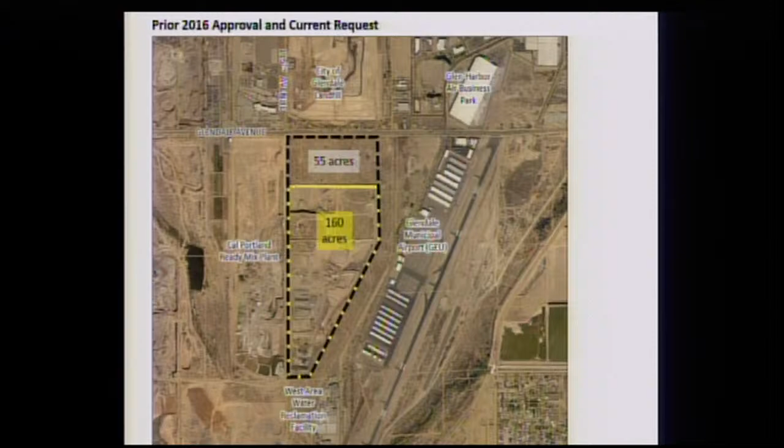Can I have the next slide, please? So this is the 90-foot setback that Council Member Clark just mentioned. For us, this proposal is a little bit different from our prior two proposals because we are moving closer to a real public street, if you will, one that actually has traffic on it, which we haven't done previously. And that's why we are proposing the 90-foot setback.

Now, again, that's less than the 150-foot setback that the landfill has, as you can see just to the north. But as you can also see in the photograph, the landfill's got a lot of activity inside that 150 feet. The landfill's got a vertical face, 150 feet away, back from the street, whereas we go down, and then the landfill uses its setback, which we are committed not to do.

This setback, however, is a little bit more than just a setback. There are some things occurring here that Councilwoman has just touched on, which is the forthcoming expansion of Glendale Avenue. That requires an additional 10 feet of dedicated right-of-way from us now. So there was a question about whether we had to dedicate and improve Glendale Avenue now or 20 or 30 years from now. Staff is correct that most of the improvements have to occur 20 years from now, but the 10 feet is what the city needs now.

We have committed to provide that 10 feet of extra right-of-way now. Second, we have committed to landscaping the area. It's in our narrative that we will put a xeriscape landscape of some kind out in that setback. Again, no active uses within our 90 feet.

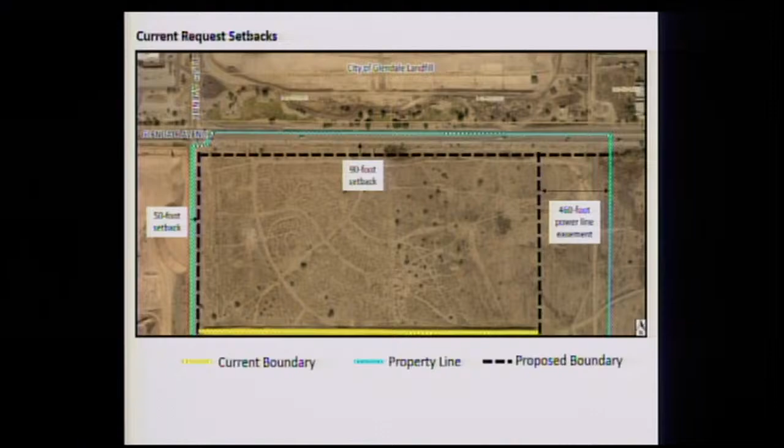So the city has approached us and said, can we run a pipe underneath Glendale Avenue and then put a drainage basin for the landfill within your 90-foot setback? And we have said, yes, we're willing to cooperate with the city and support our neighbors to the north. We think it's appropriate for us to cooperate with you in that effort. The engineering of that hasn't taken place by the city yet, so we don't know exactly where that will be or exactly how big it will be, but we know that it's coming and we've made that verbal commitment.

I did want to pivot again to the community input on this case, which is that there have been none. We've done all of the notice. We've had no comments whatsoever. We attribute that to our performance as a good neighbor and as a good responsible business operator, including our city neighbors at the landfill, the airport, and the water treatment facility.

And again, the staff report is recommending approval of the request as filed, subject to the stipulations, and the Planning Commission is recommending unanimous approval. Now, as for Councilwoman Clark's request about the setback, and I'm sorry, I keep calling you Councilwoman Clark.

Are you the Vice Mayor still, or Council? No. Okay, all right, that gentleman is.

Okay, good, thank you. The Councilwoman has suggested a 300-foot setback might be more appropriate. I find myself in the same position that your former planning director did about an hour and a half ago, which is I'm being asked to negotiate from the podium. We had met with the Councilwoman when we started this process, and this was not an issue we talked about at that time. It's a big hit, 9% of the site proposed for the expansion. This is not an inconsequential expansion of the setback request we have proposed for you. We think the proposal we've made before you is a reasonable one. It has good support, and we think we have performed in a way that warrants your consideration for approval as presented. Again, that includes the retention basin and 10 feet of dedicated right-of-way that was part of the support of the Glendale widening project.